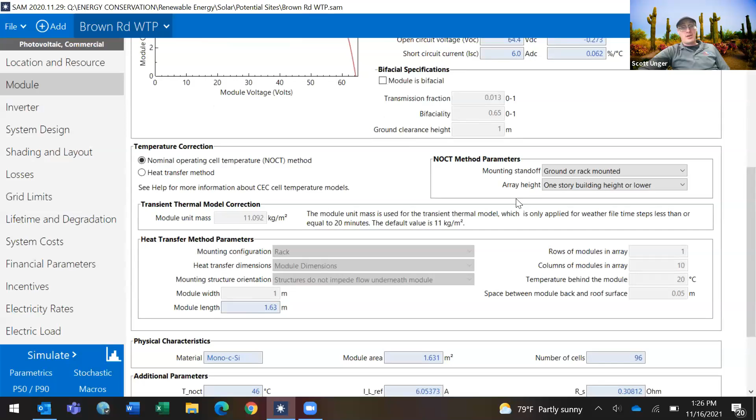And then we can go select a module, and it has thousands of different modules that you can select from. I'm not going to pretend like I have a great knowledge of this equipment in general. So we selected the default option for a single module, and you can see it provides all kinds of different parameters for that module. These ones, if they're in blue, that means you cannot adjust them, and I don't think there's any adjustable variables in here, but you can see as you select a different module, the values down below will change accordingly.

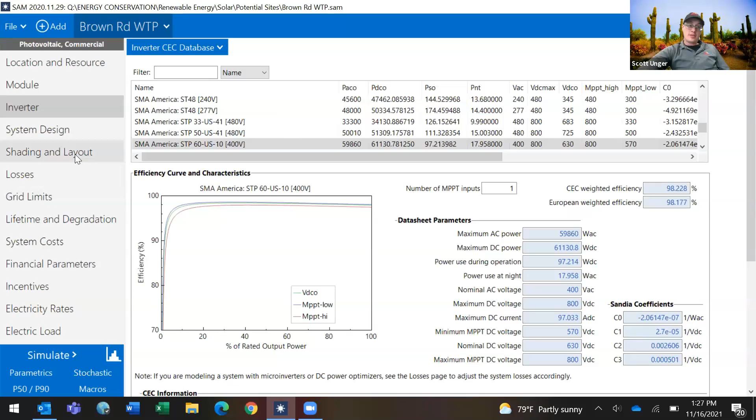And similar with the inverter right here, you have a selection of thousands of different inverters based on different specifications. We again went with just the generic selection. The system design, this is where you can specify number of inverters and modules within subarrays. We didn't necessarily get into actually configuring the systems ourselves, because what you're able to do is check this box right here, which enables you to select the size of your system.

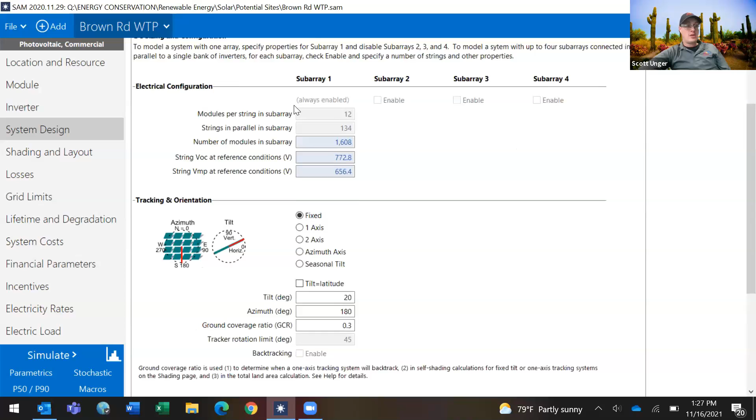So for example, just yesterday, if we look at this right here, going down below, we can see that a 450 or a 500 kW system is going to take up roughly 2.2 acres of space. And so I was posed with the question yesterday, if we had 200 acres, what would be the size of the array that would take up that 200 acres? So this is where I just had a trial and error of scaling all the way up, trying different numbers. And I arrived at the number 45,000 kW, which is 194.9 acres.

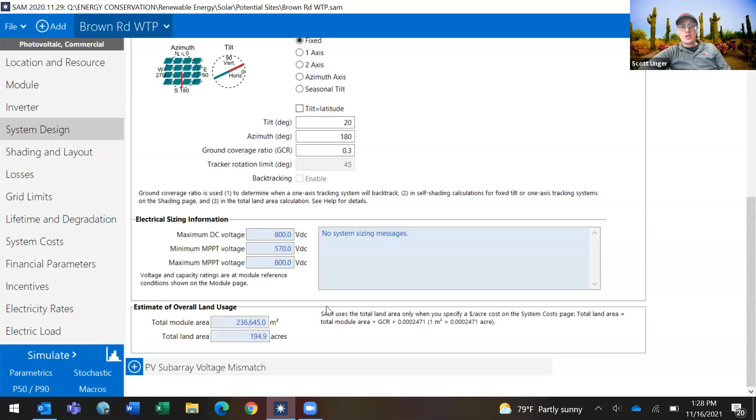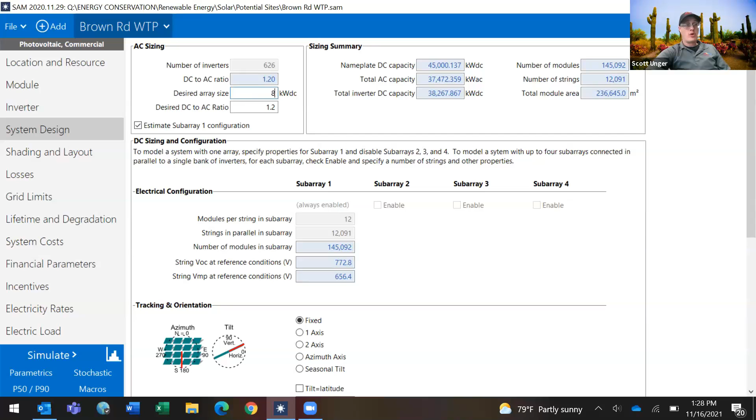So this is a great software if you want to know what would be the actual size of the array, not in terms of energy production, but in terms of its actual physical size. And it also adjusts all of these parameters accordingly if you're not necessarily an expert in solar arrays and solar configurations. So you can just select the size of the array and move on from there. And I believe for the Brown Road Water Treatment Plant, we went with 850 kW, which would take up 3.7 acres.

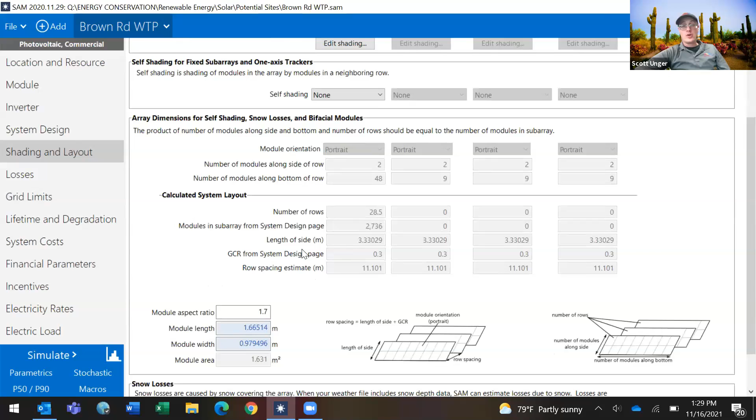Then you're able to also put in shade, which seems to be a very advanced element of the platform itself, where if you have trees or any shade covering the platform, you can account for that. So they have this 3D shade calculator where I think you can draw images over the array and it will say, okay, that will decrease production by this much, or all the related production impacts of that shade. We didn't put any of that in there because these will be open fields and we wouldn't anticipate any shade there.

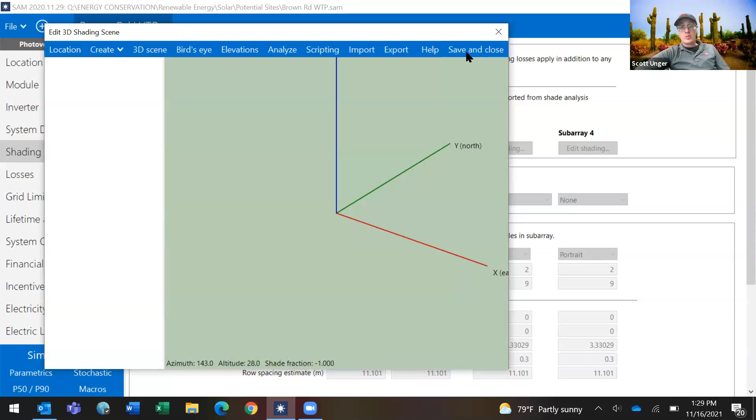It also has financial parameters. So in terms of what would be all these different tax rates, or what would be the analysis period, depreciation. I took business classes a long time ago back at ASU, so I did not touch these values at all. Again, we went with defaults. Any federal or state incentives, which were not included here.

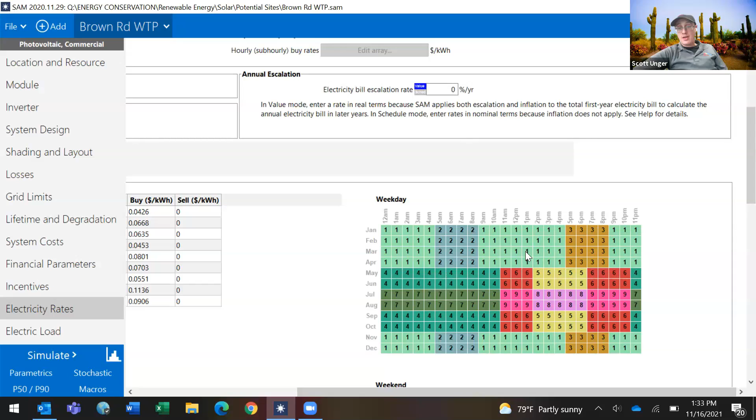I started inputting that until I saw this little option right here, where I selected our zip code, and it displays both SRP and City of Mesa. And you can actually go into Salt River Project's E61 plan, and it will download and apply that rate accordingly. So if I go down below right here, it has a whole time of use plan that I thought I was going to have to input manually, as well as the base rates associated with all of those. That saved me probably several days worth of work right there, just having that option.

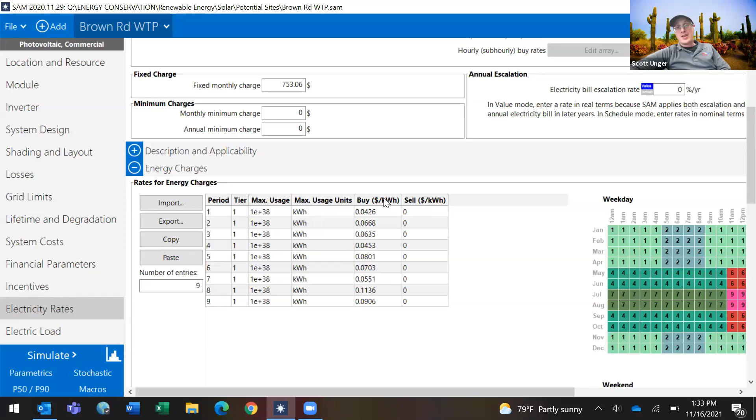And I was even more impressed when we designed further hypothetical arrays, where it also has City of Mesa's rates that you saw, but it also has our interdepartmental rates as well, which I don't even know how they got, for that matter. Those are City of Mesa interdepartmental rates, but they had them. So I was able to design a system within City of Mesa's grid based on our, it's probably not a secret, cheaper electricity rates being interdepartmental customers. So we were able to input that as well.

And lastly, you input your electricity load right here, which is done on any sort of time step that you want. So you can do it on a 60-minute or a 15-minute basis. Probably don't want to go much higher than that because you want to be as granular as possible. Given that we have Spatial at Brown Road Water Treatment Plant, and anybody who has SRP is familiar with Spatial and its ability to track hourly interval data, we basically just copy pasted a year's worth of hourly usage data at Brown Road Water Treatment Plant. And that's what you see right here. That is roughly just under 9,000 rows worth of interval data.

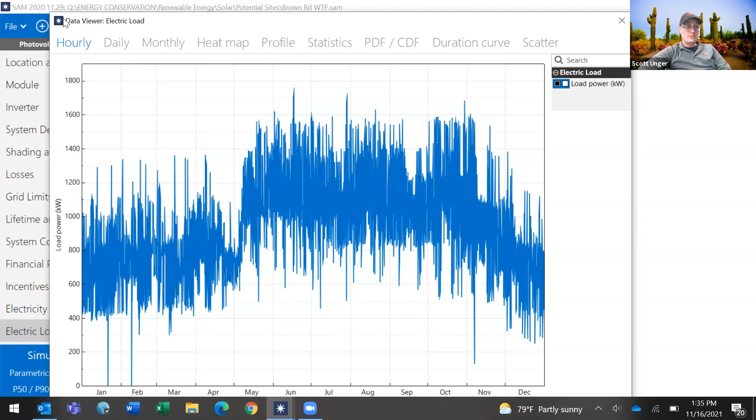And it calculates both the peak kW as well as the monthly energy loads. And then if I want, I can even view the load data. So this is what goes on at Brown Road Water Treatment Plant on an annual basis in terms of its overall load. So that covers all of the inputs. Based on those inputs, you would then press simulate, and it takes under a minute to crunch all the numbers. But the numbers have already been crunched, and this is what I obtained.

Let me see if I can minimize this. There we go. So it gives a number of different results that are incredibly useful to us, and that I was trying to design when I first started with this analysis, when I was just designing my own Excel spreadsheets.

But you can see what would be the monthly energy production of the system, where you can see in May, that's where we're having our highest production because it's not too hot. And what was most relevant to us was what was the simple payback. So financially, when would we break even on this, which would be in 12.3 years.

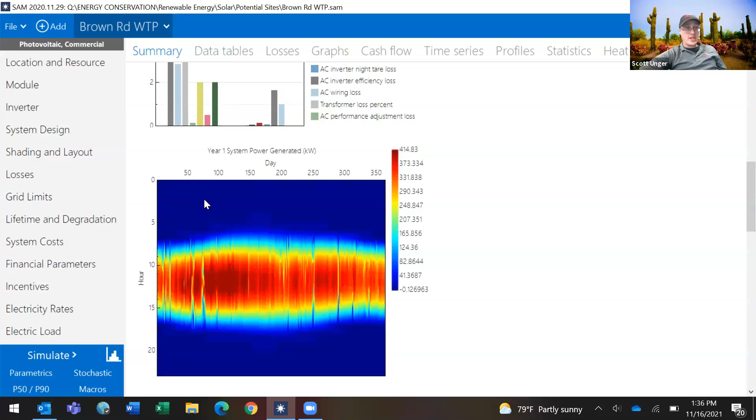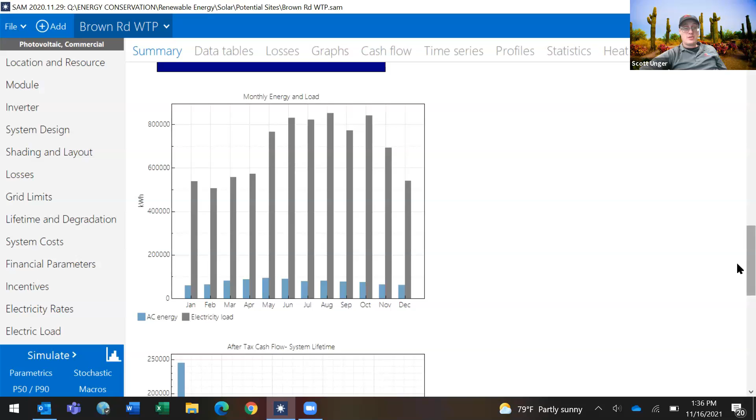And then a number of different other metrics as well that it's publishing. You can also see different types of energy loss. It gives a heat map for the system power generated at different days of the year and different hours. What is the monthly energy load versus the size of the system itself? What is the cash flow, and what is the annual production of the system?

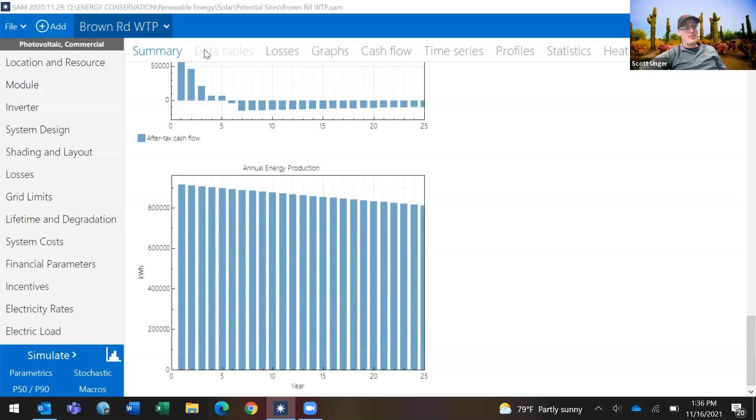And going through these, let me see if I can move this actually. There we go. So this is just the summary. I haven't even really had a chance to go through these in their entirety, but you've got these different data tables where, what we were interested in was lifetime hourly data for the system power generated. And you can see that this is every hour starting from January 1st at midnight all the way through December 31st at 11:59, what would be the hourly productions of the system.

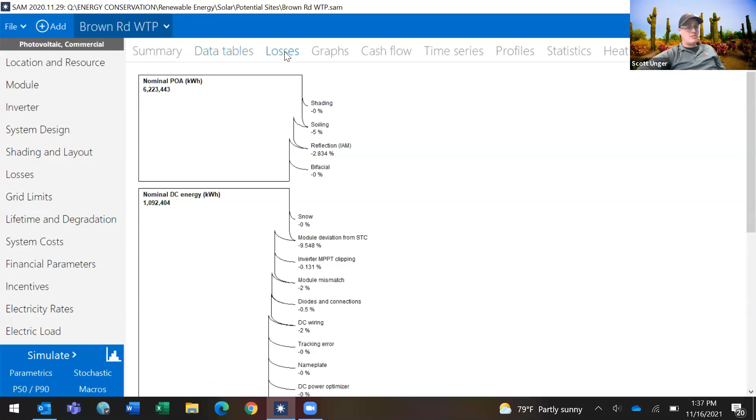But I mean, it just has so many different data points that you can choose from. And again, I feel like it's probably a good stopping point, because we've been using essentially just these results right here, and I haven't had too much of a chance to actually go into these tabs right here. But yeah, I think at this point it's worth opening up for questions or discussion to see what everybody thinks and how it might be of value to the other cities.

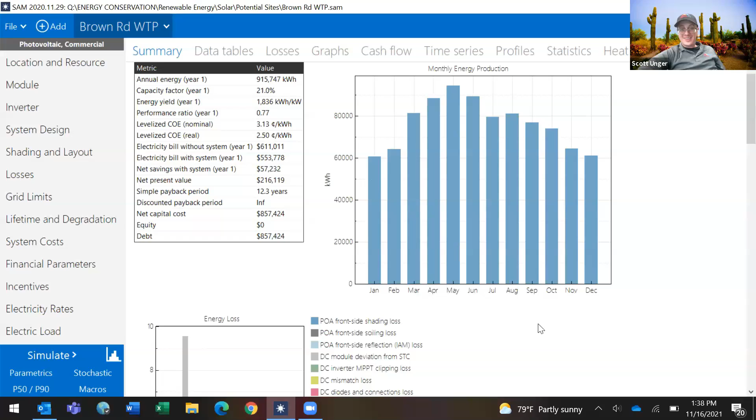And I think you just got a picture of my son with a popsicle. That's a good way to end a presentation, I think. I'd say so. Yeah, he usually has a popsicle.

Great. I'm curious, do you know of any other communities in the valley, or Arizona, that have used SAM? Not that I know of. I would be surprised if we're the only ones. And I'm pretty certain that in the past, when we've gotten reports from consultants in terms of sizing arrays for previous photovoltaic installations, they likely used this platform. Oh, good to know. Any questions for Scott?

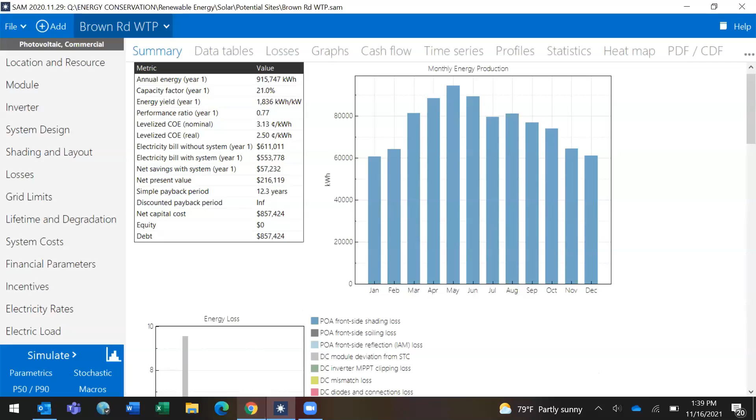I have a question, Harvey Bryan. Are there any carbon results generated by SAM? Not that I know of. And if it's not in there, that would be a huge limitation associated with the model. What would be the carbon reductions associated with installing that array? But I don't think it is in there. Good suggestion to NREL to add in.

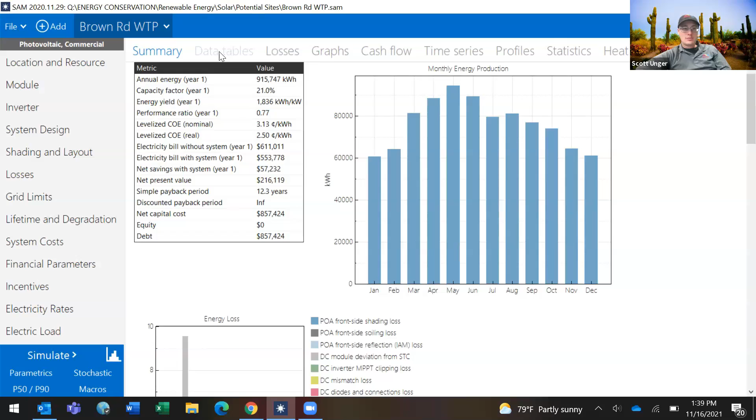And if it would be anywhere, it would be somewhere in this tab right here. I would think it would be in the annual data or in monthly data, what would be the monthly emissions associated with the system. But yeah, I do not think it's in there. So that would be maybe a shortcoming of the platform.

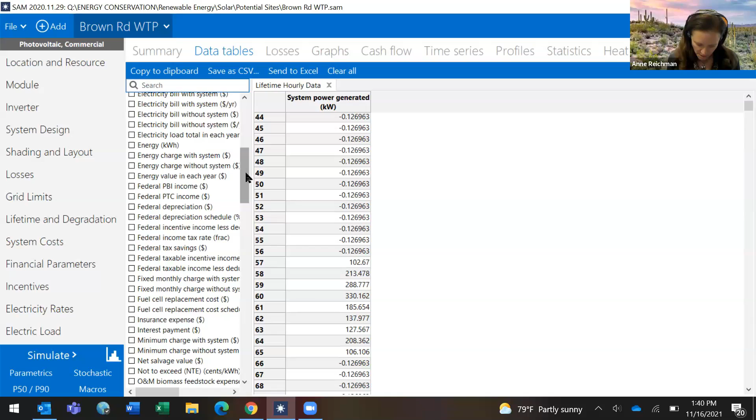Scott, did you notice anything else? Because it sounds like it's got a lot of benefits, certainly saved you a lot of time, but are there other areas where it wasn't as robust as you thought it should be? Oh, I think the point about the greenhouse gas emissions, understanding its impact on the climate, that's definitely a huge limitation, and it would be my first thought. I'm trying to think of others though. None are really coming to mind right now.

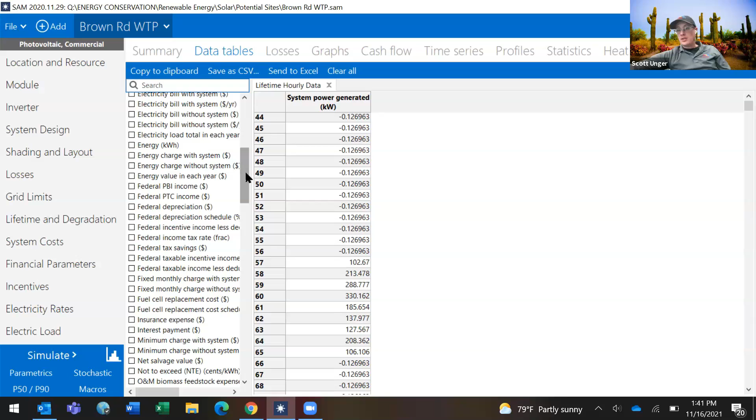I haven't had a chance to explore the other renewable energy quantification capabilities of it just yet, and I'd want to know more about what their capabilities are. But at this point, it did exactly what we wanted it to do, which was calculate the economic and energy impacts associated with the system, specifically on an hourly basis, because understanding those trade-offs for thousands of hours worth of rows was just something we weren't able to do. I'm trying to think of other limitations, but it's pretty good. And you said it's a free resource, right? Yep.

So Scott, this is Chris. If you take the numbers that you put forth in the software, and say you want to go forward with it at that site, are you going to procure all of the work to be done yourselves, or are you going to hire an ESCO type service to go forward with that? I think that depends on the scale of the installation.

We'd probably want an ESCO to back up the numbers that we calculated. I think this is more of a validation related platform or tool for us, and perhaps to steer our decision making initially, to say what sites would be most preferable or most suitable for a PV installation, and what would be the size of those different arrays, and this helps to inform that decision making.

But I think it depends on the size of the array. If it was just like a small carport, probably not. But if it was a massive array, say we're talking about a Brown Road water treatment plant, or somewhere else, then we probably would bring an ESCO on to give a second opinion or a validation of the numbers that we first quantified.

Salim, you have a question? I do, yeah. So my question is whether the system can optimally size the PV. Let's say you don't have any restriction on the site. Can you optimally size the system? That's one thing, I guess you guys are better at thinking of limitations than I am, because that's something that I was not able to do. It might be a capability of it, because there's just so many different variables within the software itself, but that would be something to understand.